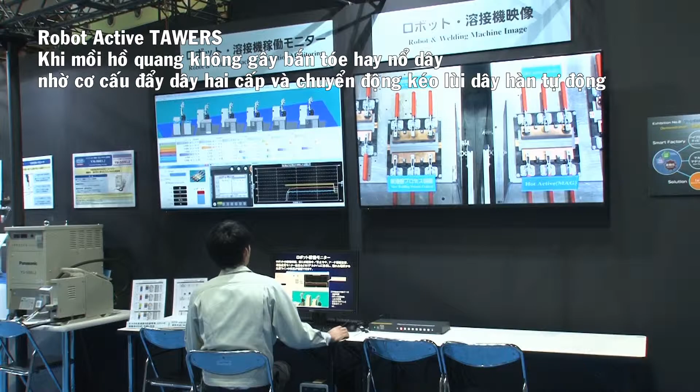Here is the central monitoring room that centrally and remotely controls the manufacturing site. This room has a monitoring system for viewing the robot's operating status and manufacturing progress in real time.

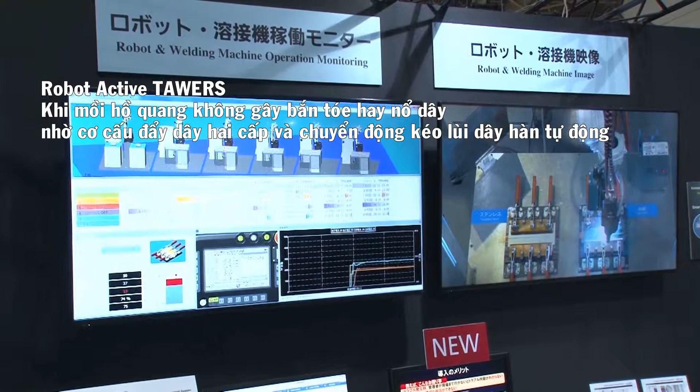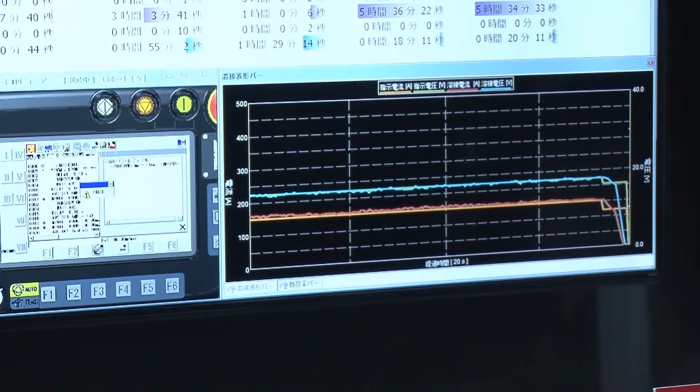As a particular note, you can monitor the robot's movement and waveform while welding in real time by using the robot's monitor function. It is additionally useful towards improving welding posture and conditions.

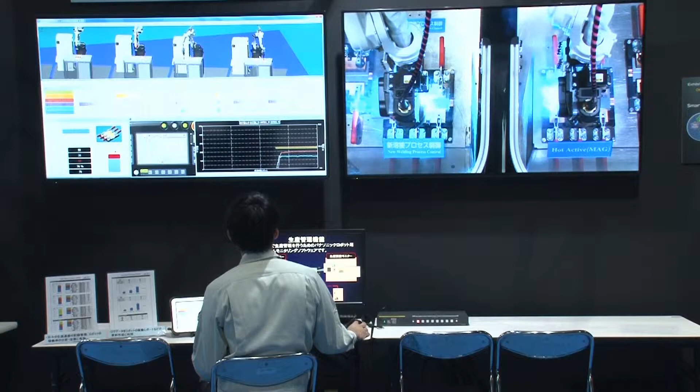By using both the live camera footage and digital display, you can efficiently monitor the manufacturing site from the central monitoring room.

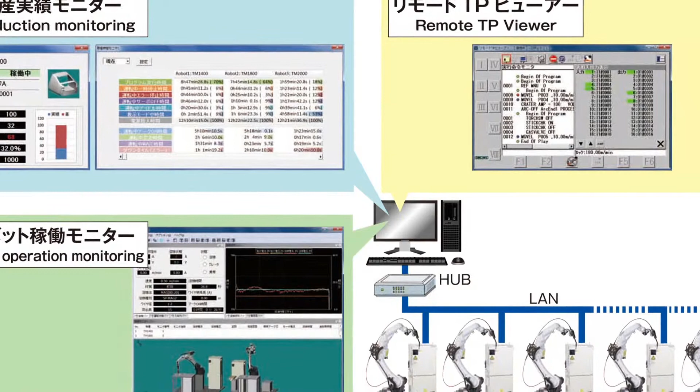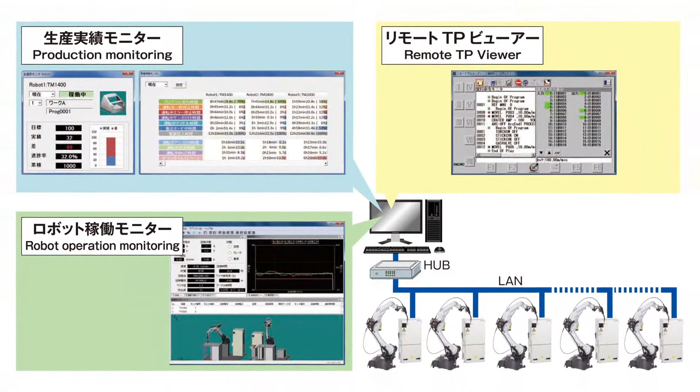By connecting the manufacturing site's robot to an intranet, you can see the robot's operating status remotely. You can also use this function to analyze the production line's operation rate and to improve the production process. This system will help to optimize the entire factory.

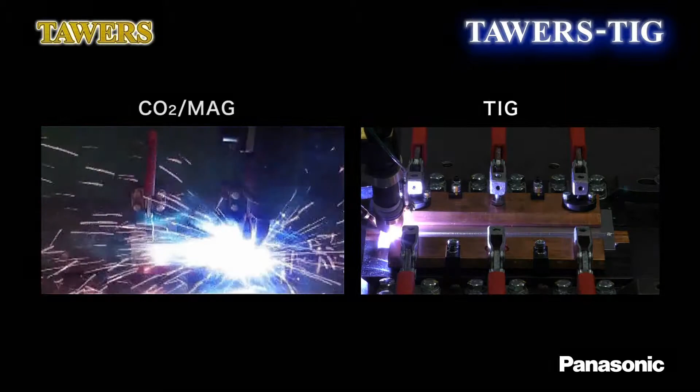We will introduce TAWERS TIG. TIG welding is different from CO2/MAG welding since TIG welding can prevent spatter and create beautiful-looking beads.

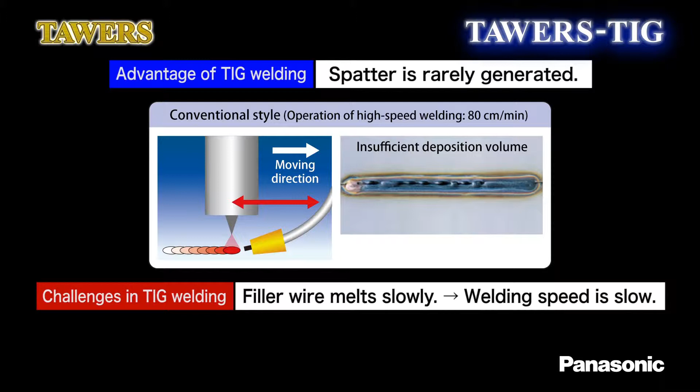However, there is an issue in that the wire melts slowly and welding cannot be sped up, because conventional TIG welding feeds the filler wire to the molten pool on the workpiece for welding.

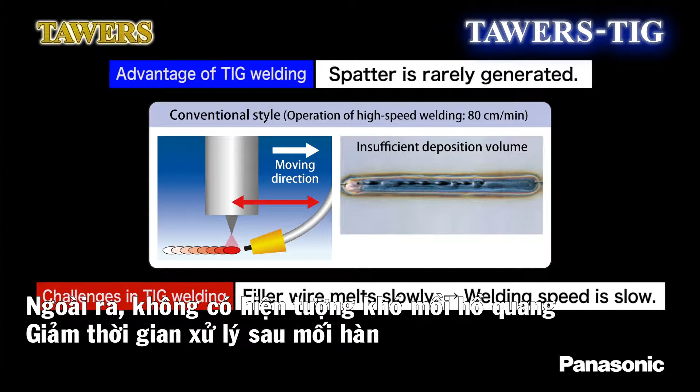In the TAWERS TIG system that we are introducing, the filler wire is located closely to the electrode, which lets the arc preheat the wire. That way, the wire melts faster and the speed of the entire welding process is improved by the TIG welding robot.

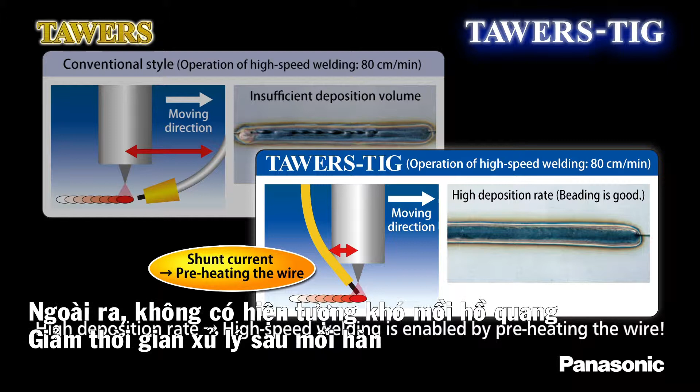As already mentioned, TAWERS TIG welding offers much faster welding operations than conventional TIG welding.

Also, by adding the TAWERS TIG start unit, you can have a high-frequency start. That way, electrodes are long-lasting and arc starts good and short.

With the software, TAWERS TIG welding can profile height simultaneously to absorb the distortion from welding.

First, we will show you high-speed welding at 80 centimeters per minute using a 1.5 mm thick plate of stainless steel. The first half will show continuous welding, and the second half will show arc spot welding, which shortens the startup time. Please watch both demonstrations.

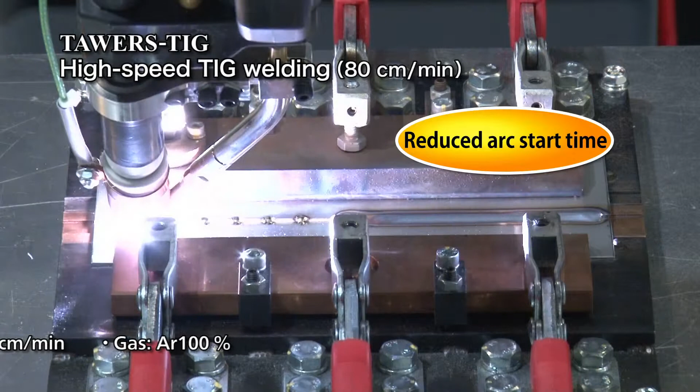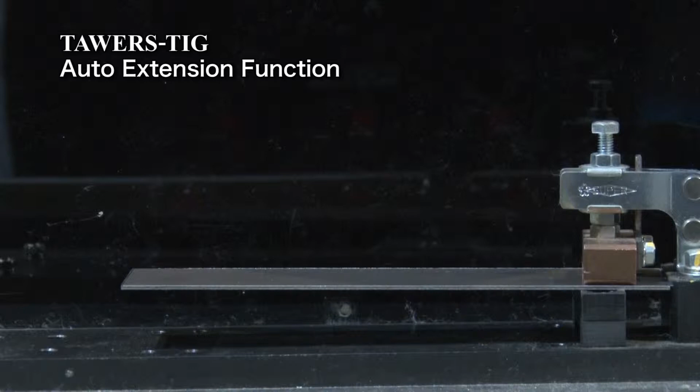Next, please watch how welding is done simultaneous to height profiling that absorbs the workpiece's distortion from welding.

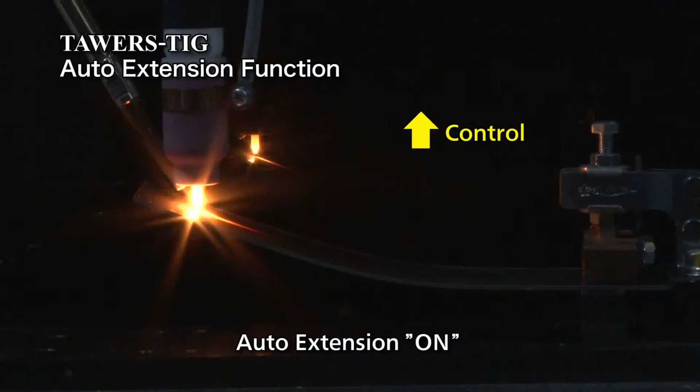As you can see, TAWERS TIG is a TIG welding robot that can achieve both a beautiful-looking bead and high-speed welding.

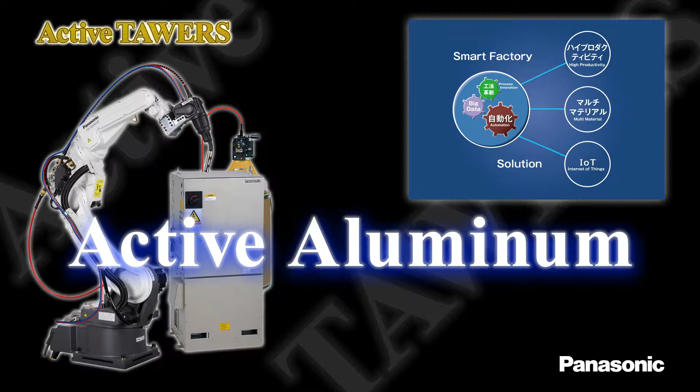We will introduce our active aluminum process and laser sensor. The active wire welding method is effective in reducing spatter and preventing burn-through when welding aluminum.

In addition to conventional DC pulse welding, AC pulse welding has been developed to reduce heat input. However, when the wire extension changes, it causes the spatter to adhere. In the case of ultra-thin plate, heat input is high and causes burn-through.

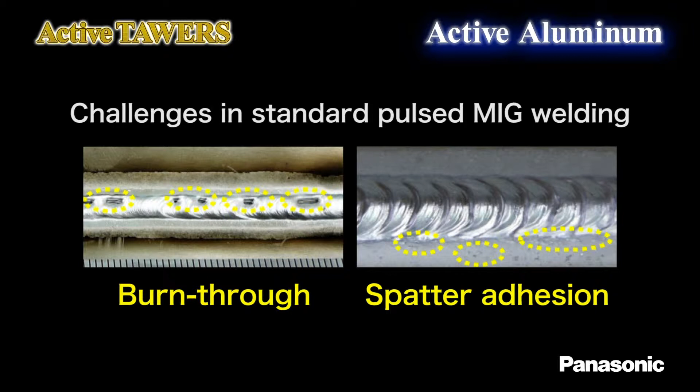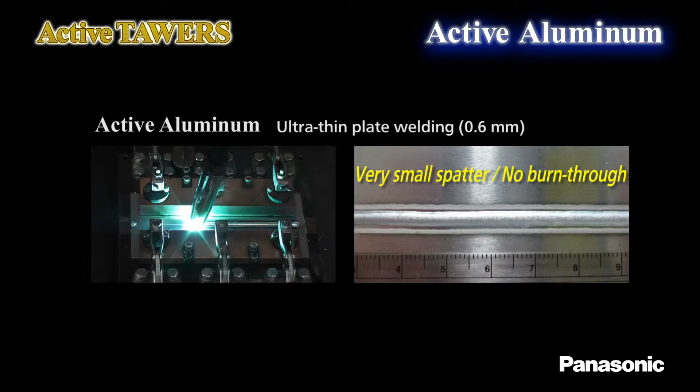On the other hand, active aluminum smoothly opens the short circuit to enable welding with low heat input even for thin plate. That way, it is able to prevent the generation of spatter and burn-through.

Also, by using spiral weaving that is integrated into the robot's functions, you can fully synchronize welding output, wire feed speed, and weaving movement. That makes it possible to obtain scaly beads that look like the work of a master craftsman.

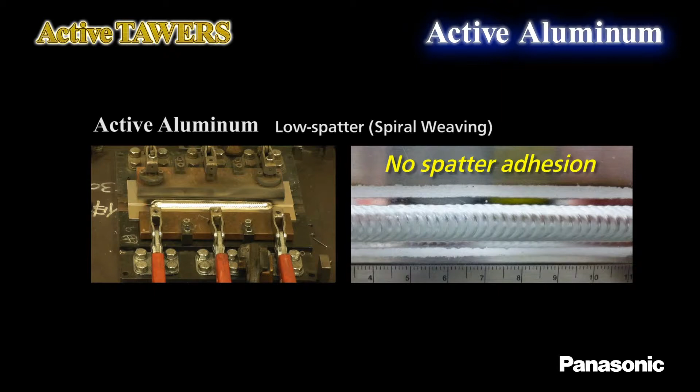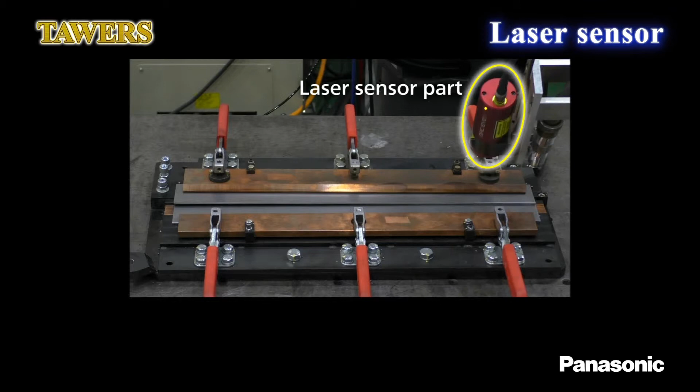This upcoming demonstration also shows simultaneous positioning by the laser sensor. The laser sensor recognizes the workpiece in 3D form so that it can work on the distortion from welding simultaneously while welding.

With the laser sensor, you can weld a thin plate in a straight line. Also, as a big feature, it can work with glossy materials such as stainless steel and aluminum.

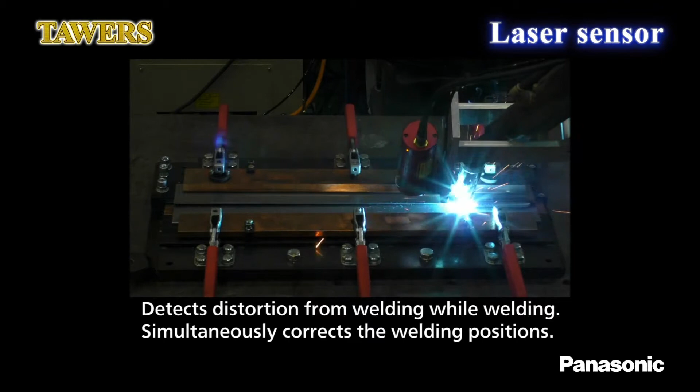Now we will show you welding of a 0.6 mm thin plate with a 1.5 mm gap using spiral weaving.

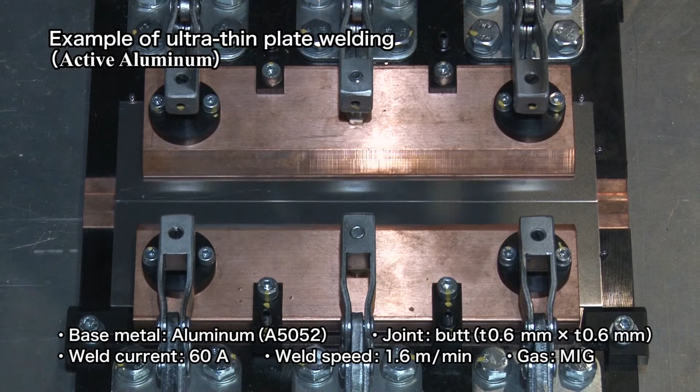A 0.6 mm thin plate is welded. You can see the welding with no spatter generated and no burn-through.

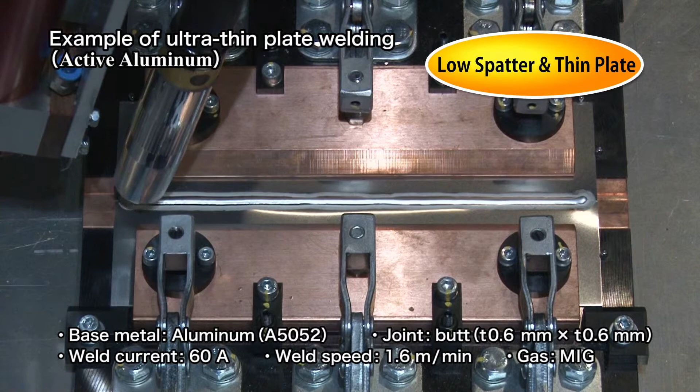The spiral weaving function can change two welding conditions in a spiral motion.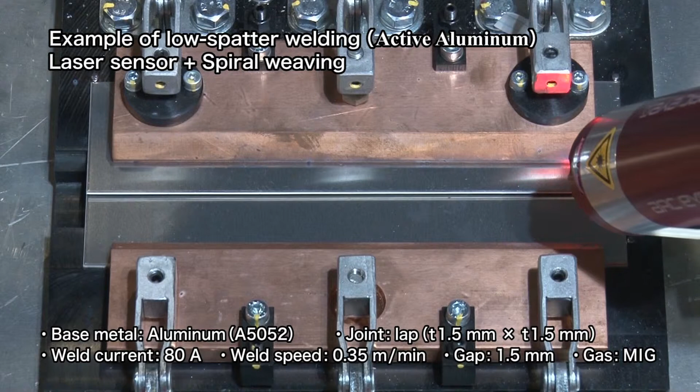For thick plate, welding proceeds at high output, whereas for thin plate welding, output is low. That way, it is very effective for welding thin plate like aluminum and gap welding.

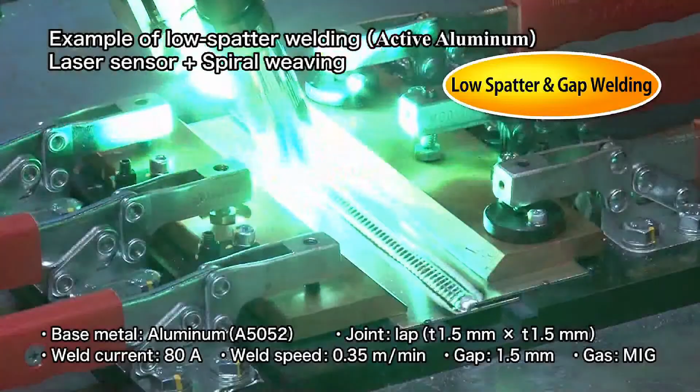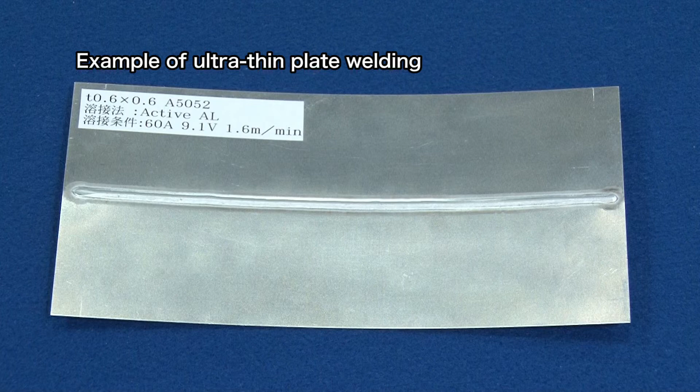As a welding method, active aluminum is a great fit for thin plates like aluminum used in automobiles, motorcycles, etc. Also, by using a laser sensor, high-quality welding is possible even with workpieces that tend to deform while welding.